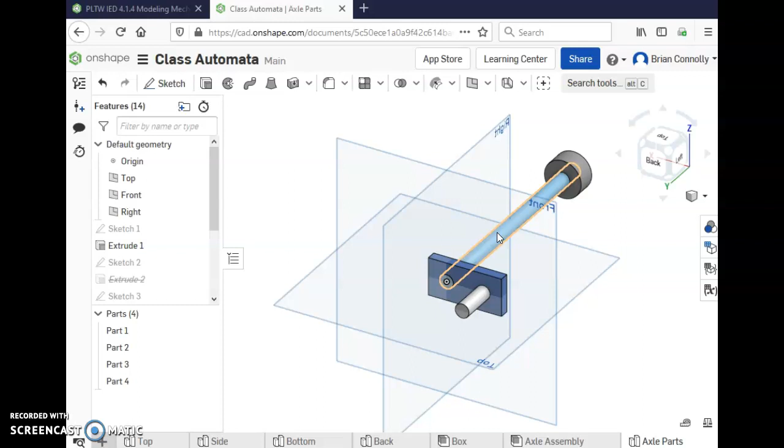Really quickly in this video, I'm going to show you my process for creating the axle. And the reason I'm going to show you this is we always have to have kind of an eye on how we might actually create our different parts. And in years past, when I asked people to design an axle, they found one online, and it was made in such a way that it would be very difficult, not impossible, but very difficult to actually build and put into our box assembly like this.

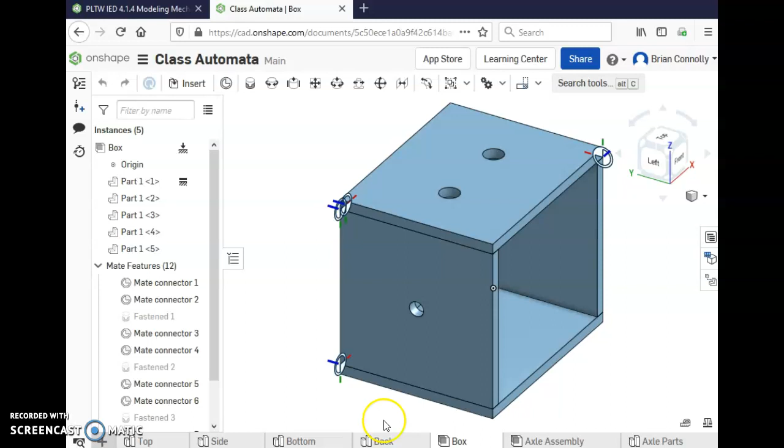So I'm going to just kind of go through the parts and pieces. You already know how to make every single one of the parts and pieces. I'll just kind of explain the different things I have going on. The first thing that I did was I measured the distance from one side to the other. And you can see that I've got this 5 inches along my red X. And when I'm mousing over that, you can see that there's a dotted line that shows up on my drawing. So when I've got that, I can see, okay, that's my measurement from one side to the other. It's 5 inches. That's great.

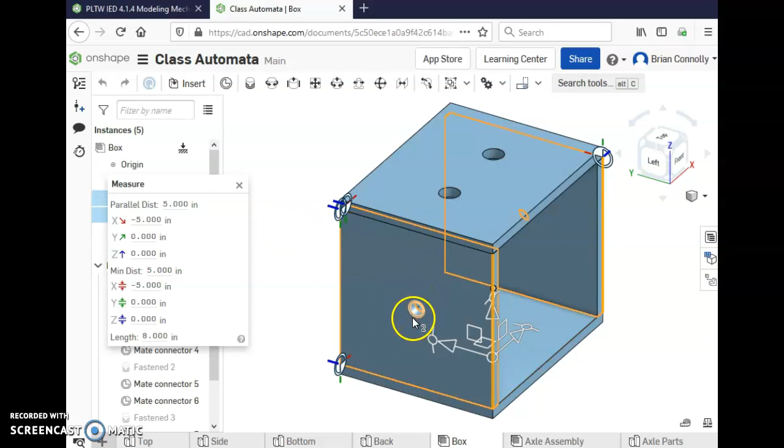Now I know the minimum space that I need to go between. My axle will be at least that big. The other thing that I need to know is the diameter. So I'm clicking off into space and then clicking the circle. And the diameter right here is 0.375. And I remembered that all of my cams also had an axle size of 0.375.

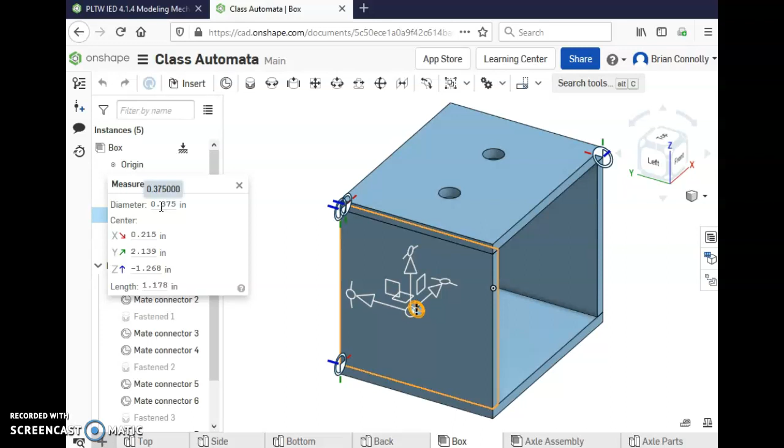Largely it doesn't matter as long as I am able to provide to you a dowel of that size, you can use it. So many people in years past have used half-inch dowels, 0.5. Others have used quarter-inch dowels, 0.25, to pretty great effect. And the only thing that really matters is that those all agree. And so we can kind of sand them down, but if they pretty much all agree, it's all good.

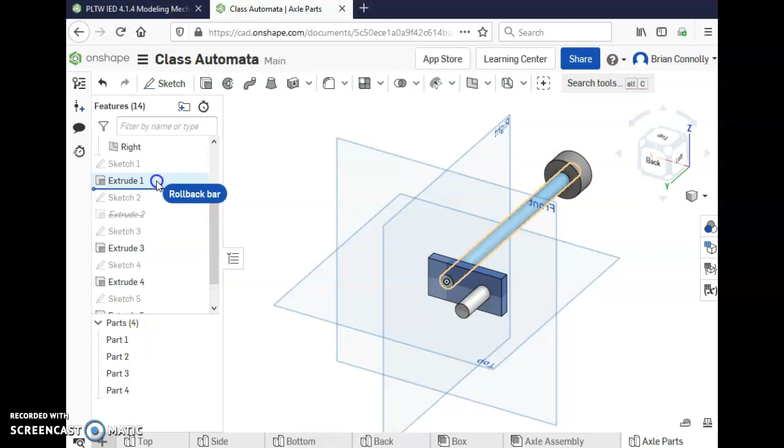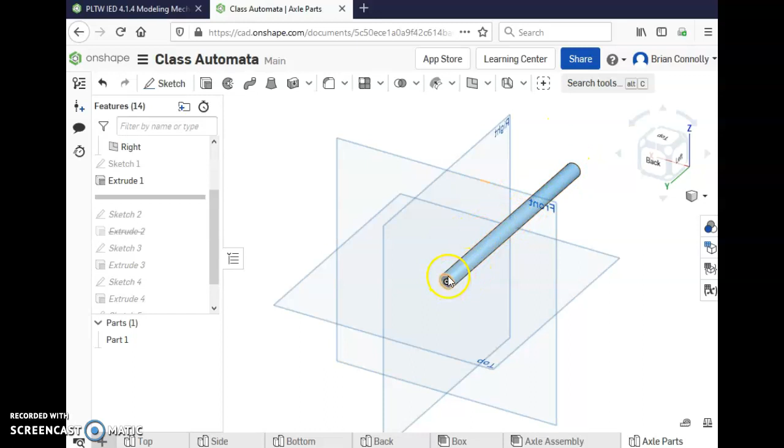So I've got my information there, and then I'm going to kind of go back in time here and show you this first extrusion. And this first extrusion really is just the axle. And this is actually incredibly easy to make. We already have dowels that are cylindrical like this, and all we have to do is make one cut, and we've got this part already made. So I'm trying to always be thinking about how do I make this so I can actually build it physically in about the easiest way possible. So first I create this dowel, and it's cylindrical. I know I have some stock that is cylindrical. I can make one cut, and all of a sudden I've got the correct length.

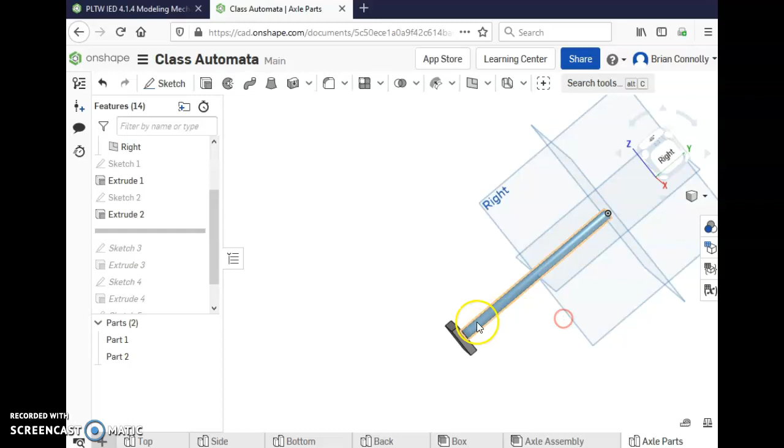The next thing I'm going to show you is actually a couple sketches and an extrusion that I've actually suppressed. And that's a way you can just right click and suppress or unsuppress, and all that does is kind of hide it, I guess, but it turns that extrusion off and it disappears. That's kind of a before and after.

The easiest way to actually stop this from sliding, we don't want it to slide too far one way or the other, is to have a little block of wood that you glue on the end of your axle. And that's pretty simple and easy to make. We just cut a little piece of wood here, glue it on, super glue, wood glue, both will work pretty easily.

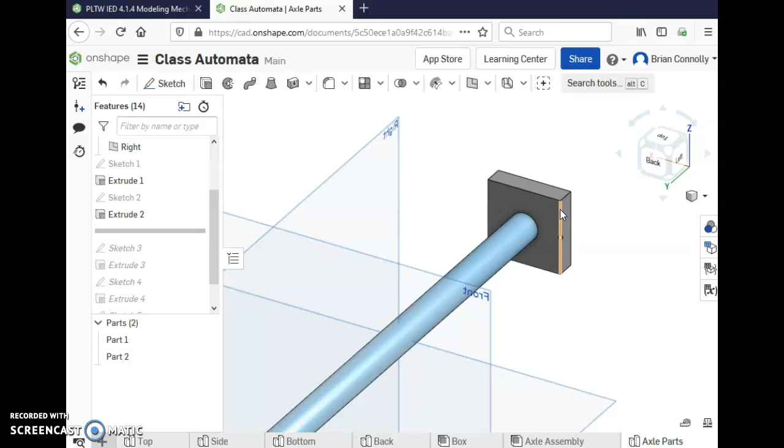The other option there, I'm actually going to resuppress that, and then I'm going to show you the other option. And what I've seen is a lot of people will take kind of a larger dowel, and then they will drill the correct size hole in the middle, so 3/8 in this case. If you're going to do it this way, anytime you're drilling into a small part, it's kind of difficult to do. It's difficult to line up. It's difficult to make sure it's clamped and held in, because you definitely want to have this clamped in a way that you don't have to touch the larger dowel.

You can have both hands on the drill if at all possible. So my suggestion is, if you're going to go this route, when we do actually get to building, or if we get to building, that you actually cut the larger dowel even longer, even if it's 2 or 3 inches. That's okay. You know, we can buy new dowels, we can't buy new fingers.

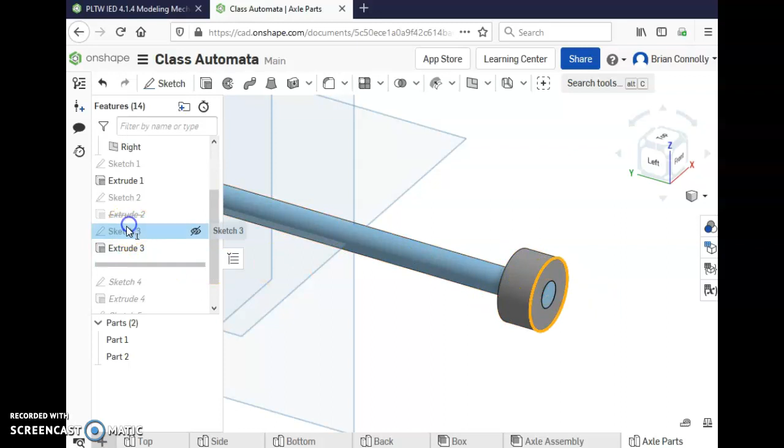And so make it extra long, drill it, and then cut it with a lot of extra there. And so always think about how are we going to actually hold on to this, how are we going to actually build this thing. So all I did was create a sketch that was a circle around this circle and extruded that. But we can drill a hole into a dowel, cut it to length, and have that.

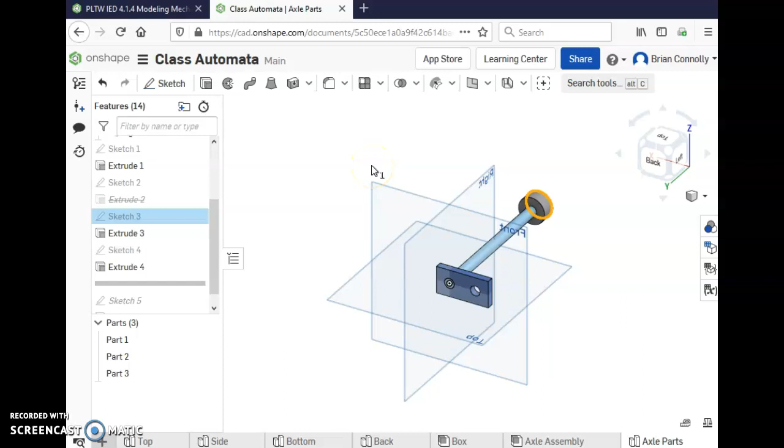The next thing that I did was I looked at my other side, and this is my preferred way. It's fairly simple. Again, we have a rectangle with two circles drilled into it. No big deal. Fairly easy to make. One thing that I will say is be careful. You don't want too little space around this.

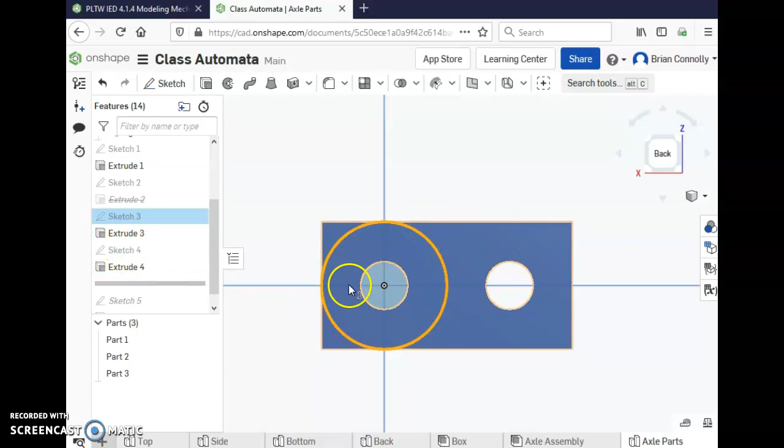I might have just a little bit more space than I really need, but if you're going to be cutting into wood, this can split fairly easily, and so you want to make sure that you've got a little bit extra around here. If you wanted to, you could actually round the corners. Those are fairly easy. You cut it and then you would sand it or file it, not using power tools for that, but you could create some fillets around here if you wanted.

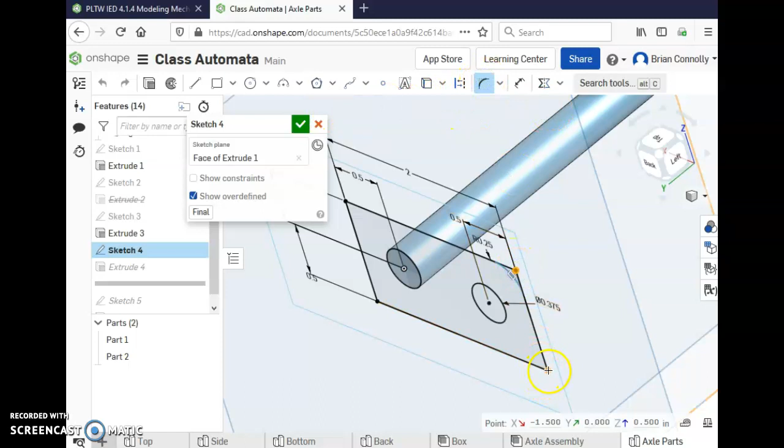You'd probably estimate, so I'm going to do 0.25 for the fillets, but for the most part you'd probably be estimating. I might actually make it 0.375, a little bit bigger. That's a nice size and shape. And again, you just file and shape those after you cut the piece, and probably after you drill, actually.

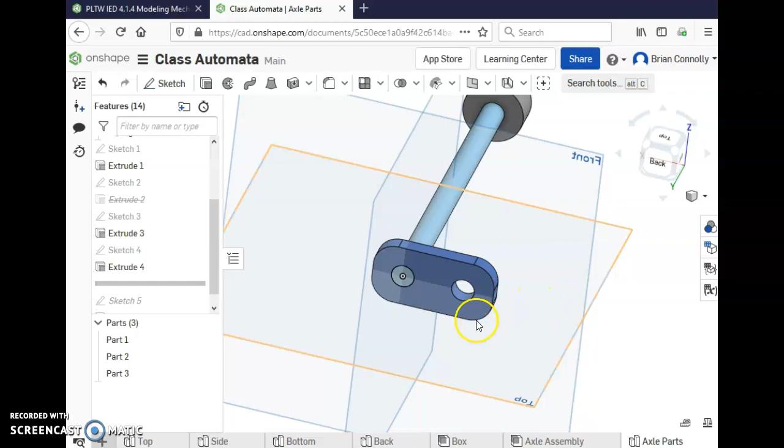And then after I've got this little piece, again, anytime you're cutting, you want to think about having a larger piece that you can then clamp to something. It's a lot easier to do it that way. But this is fairly simple to make. 2 holes, drill it in, and then cut it to size.

Then the next thing is really just, we'll probably cut it at the same time as this other one, create a dowel. And I made this one 1.25 inches long. And the reason I did that was because I know this is 1/4 inch long here, and then I wanted an extra inch for the handle. And you can make that a little longer, you can make it a little bit shorter. Largely isn't a big deal either way.

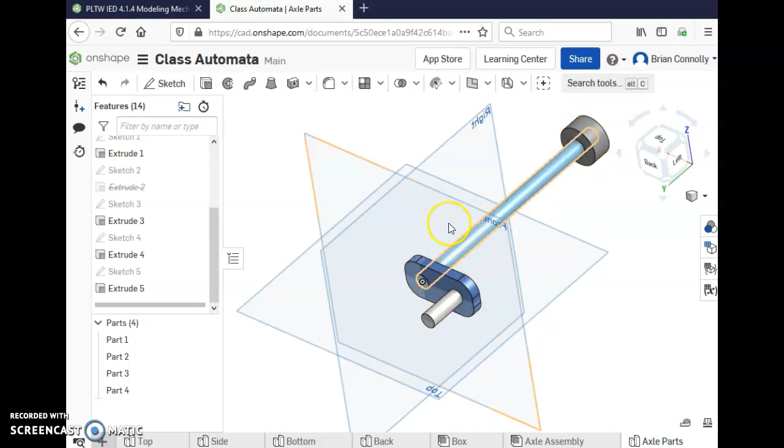It both works. And so this is really what I would encourage you to think about, is how do you make your axle in such a way that you can make it very simply, very easily, very quickly out of numerous parts. This is the way that I've done it in the past. If you have another new creative way, let me know, and I'd be very interested to hear about that. But this is really the process here.

One last thing that I did not mention: every time that I've created a new part, you can see they're all different colors here, between blue and gray of various types. And that's because every time in this part studio, I created a new part as opposed to just melding it all together. And we want all of these parts and pieces to be separate because they will be in real life. Whenever you're actually building it, they will be all different and separate. We'll glue them together from there.